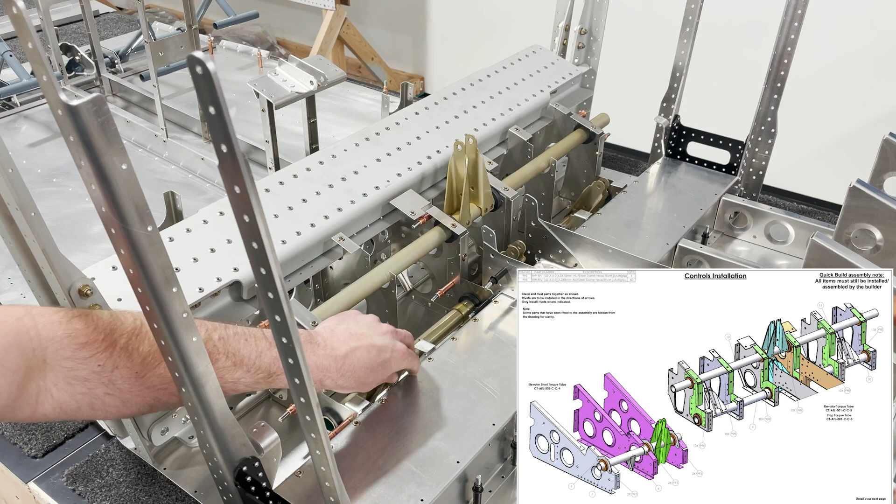So the next step is to fit our control torque tubes for the elevator and flaps. This process is fairly time consuming to get perfect, but it needs to be perfect for a smooth flying experience later on. So a couple things to make note of.

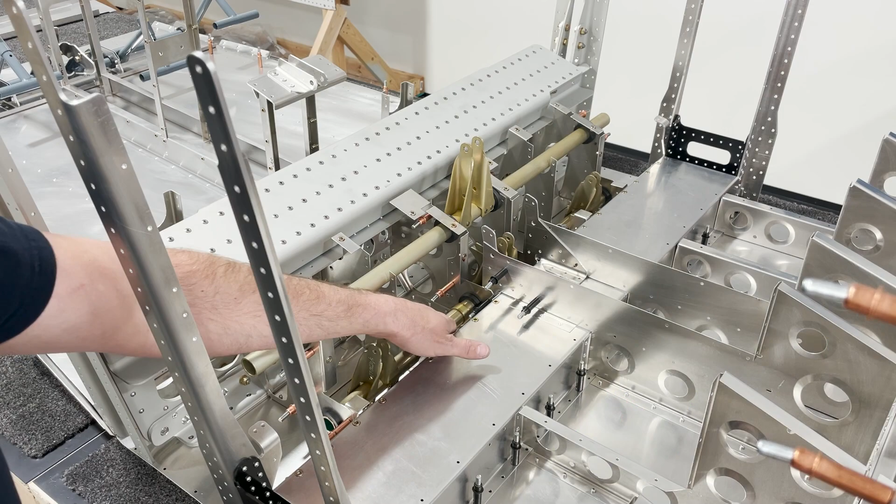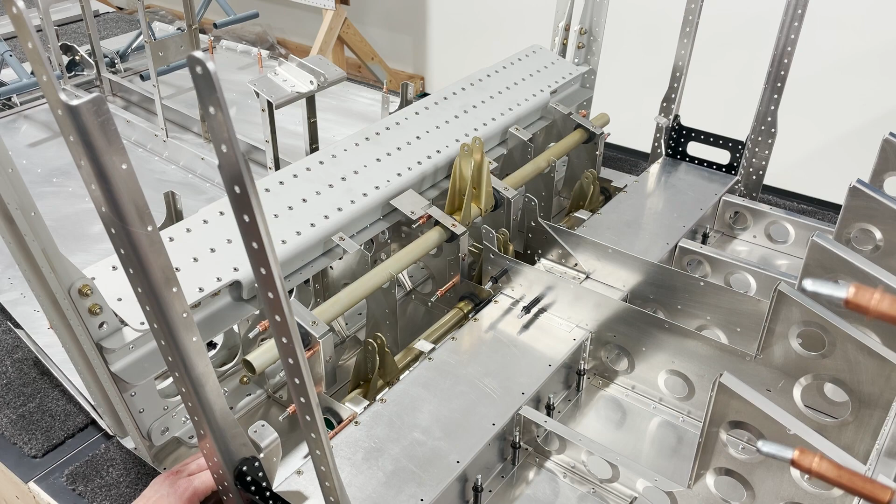First, start with your elevator torque tube and make sure that all of the channels at the bottom of the U are aligned perfectly. If that means removing very small amounts of material from the center, as was the case with this assembly, with the center two channels, do so, so that all four bushings contact the bottoms of their channels at the exact same time. That's the first step. Any slight amount of binding in these bushings will cause this to bind up really bad.

And of course you want this to be perfectly smooth, and you don't want to have to use any grease or lubricants on it, same as the rudder pedals. If you want to use dry lube, that's fine, but you really shouldn't have to once everything is dialed in perfectly.

So once you've got it resting down into the bottom of the U channels smoothly and evenly across the whole assembly, the next step is to cleco on these locking channels here to make sure that the assembly is still fitting perfectly. All these holes should line up on the channels. You can notice that I've left these two off.

That's just because they're not locking in any bushings, so of course they're going to fit without issue. So then once you start testing on these locking channels, you may need to remove very slight amounts of material from the top of these, just so that you get a firm fit. There should be no play in it whatsoever. But sometimes there's a little too much interference, and that causes the assembly to jam.

So once again, it's a very time-consuming process. It's 0.1 millimeters at the most at a time, very slowly removing material so that everything is dead straight and perfectly aligned. Then once you've done that with the elevator torque tube, you'll do the exact same process with the flap torque tube.

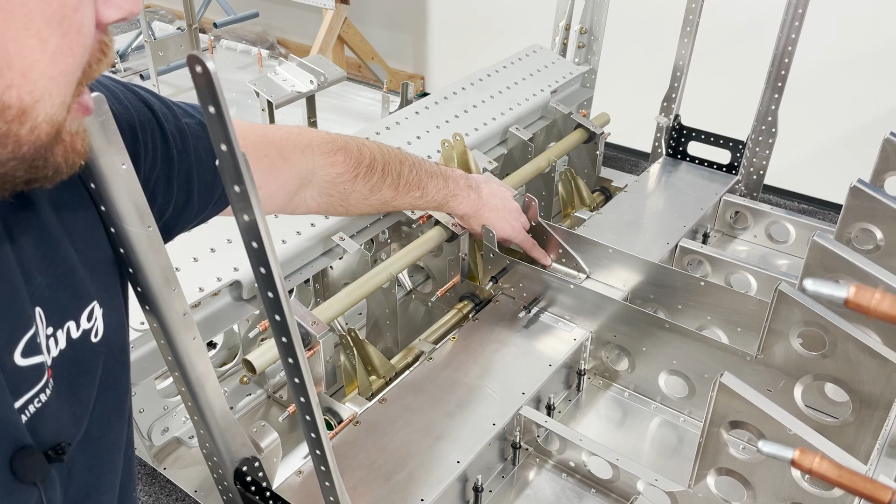Next step is to get your seat belt reinforcement brackets installed. There's a little bit of a trick to those as well. They're such thick material that when this bend is created, it'll flare out just slightly. You might be able to see it here. With this thicker material, when they bend it, just the far inside end will flare out slightly, and you want to very slowly file that material down so that it's a nice smooth fit across all of the faces.

And so now that we've done that, we can join the rear fuselage onto the center fuselage and keep working from there.

The next step is we're going to join the center and the rear fuselages together. So as you can see here, you'll need to place the rear fuselage up on blocks so it meets the proper angle to the center fuselage.

I like to use these foam core insulation panels because they cut and stack easily. You can make a wood jig or whatever is easiest for you. And then we're going to start by clecoing the center to the rear fuselage, and I'll show a better angle of that.

As you can see here, the rear fuselage joined to the center fuselage. You'll start by clecoing and then riveting the three rivets from your longerons to the ribs here, and then you'll rivet the three rivets from the rib to the rear fuselage.

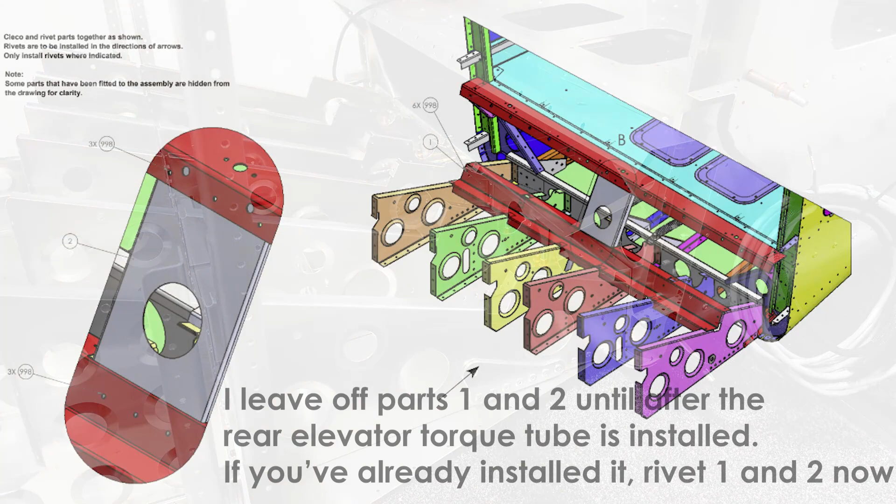This is where it's kind of a personal decision, whatever is going to be easiest for you. If you don't have this rear floor skin in place yet, it is easier to access all of those rivets, but having that rear floor skin also gives you a little bit of added support for the location of the ribs. So there's no better way to do it, it's just whatever works better for you.

Once we've got all of those rivets in place, you can also see that I've got a line of clecos holding the floor skins between the two pieces together. We will have to rotate everything onto its side at a later step in order to get those rivets in.

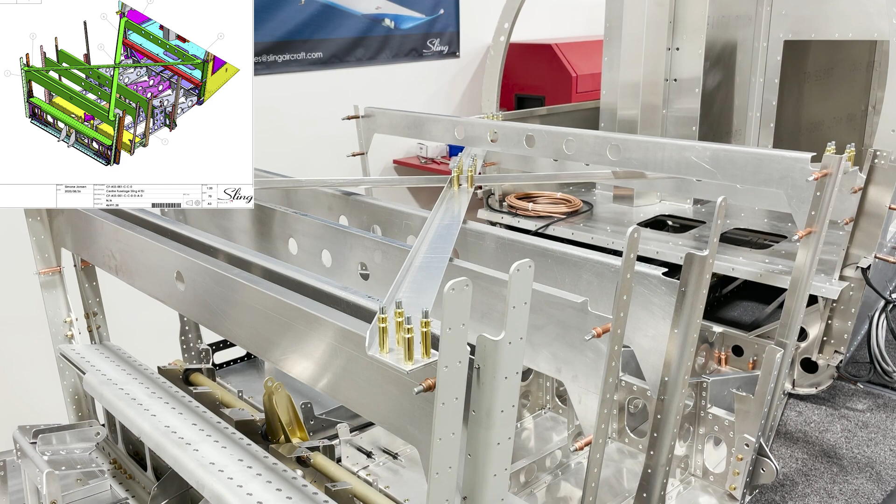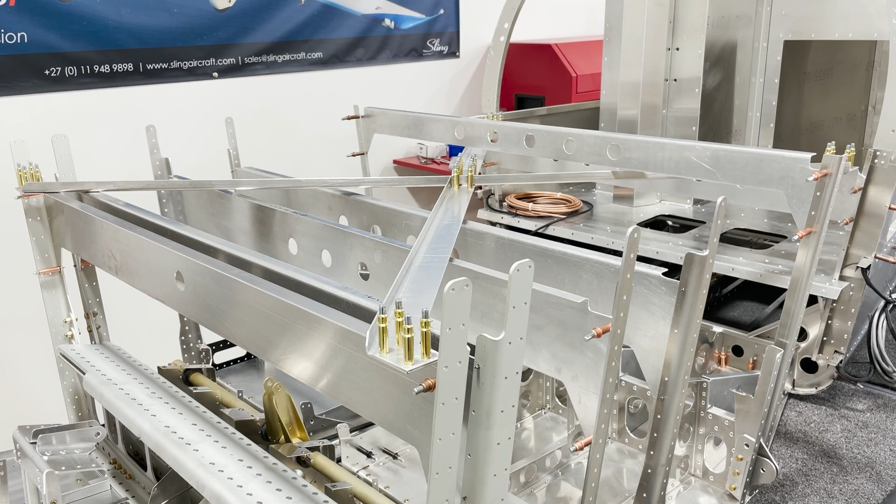The next step is fairly straightforward. We've got to assemble the cross bracing onto your jigs, and that holds the top as well as the rivets from below holding the bottom. So everything should be aligned well and there's no twist in the assembly or weird torquing on any of the parts. So rather than installing the control tubes, the control sticks in place right now, we're going to move ahead and do the side skins.

Sometimes there can be some strange positioning issues that can cause those control sticks to bind if you leave everything sitting as it is right now. So we'll go ahead and get those side skins installed, and then we'll install the control sticks.

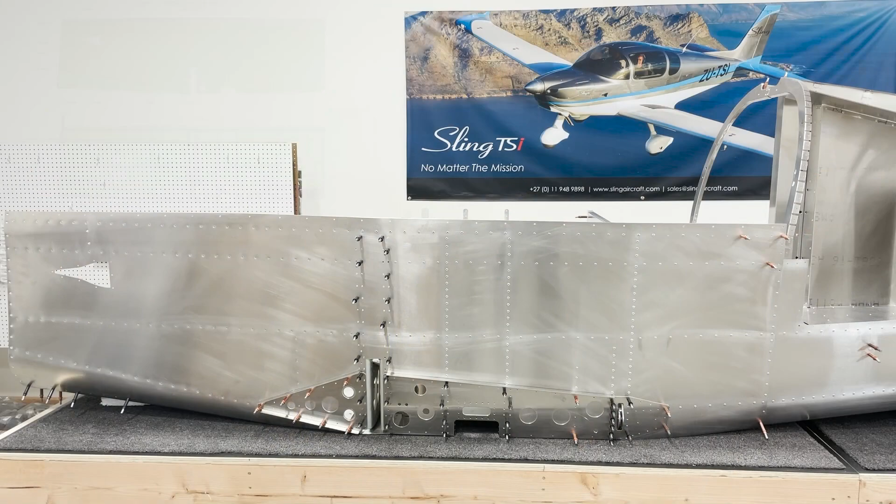The center fuselage side skins installation is fairly straightforward with the exception of a couple things to look out for. When you install all the rivets onto your center fuselage side skins here, make sure to, if you don't cleco these support channels on, at least line them up and mark out where they're going to lie. You don't want to rivet any of the rivets down here where they're going to go. And you don't want to install these before you've riveted these, because there's a couple rivets, mostly just this one here and this one here, that are a little bit difficult to access with this plate here. So keep that in mind.

I always just basically cleco them on how you see here, and then rivet here, remove them to put this rivet, and then move forward. Also, in this top corner here, I leave off some of these rivets down here because I put on the rear top skins in a little bit later step, so that just makes sure that when I pull these clecos out, I'll have enough space to kind of peel this back and let that top skin get underneath here.

In addition to that, as you can see, I don't have my main spar channel riveted yet, or the carry-through channel riveted yet. And that's because there's one extra step here that I like to do before riveting this down nice and solid, and that's just measure the main spar thickness on your wing and make sure that's exactly the same dimension as here. If you rivet this down and this is for some reason too tight, you're going to run into problems for final installation of your wings later on.

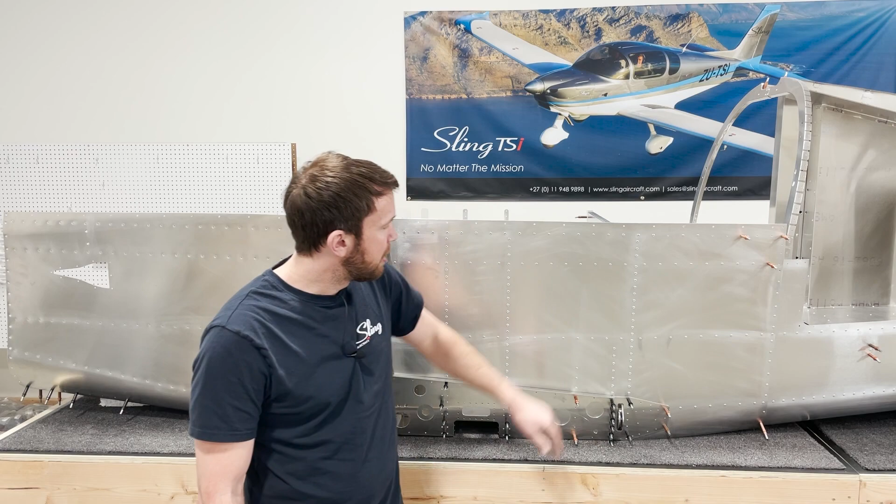Lastly, the top couple rivets here may have not been punched in your side skin. So this is your rear spar support channel that comes up right here. You'll want to, after you've got everything else installed, match drill those from the other side to put the hole on the side skin here, so that channel can be riveted all the way up and down. Other than that, this process is fairly straightforward and everything should line up nicely.

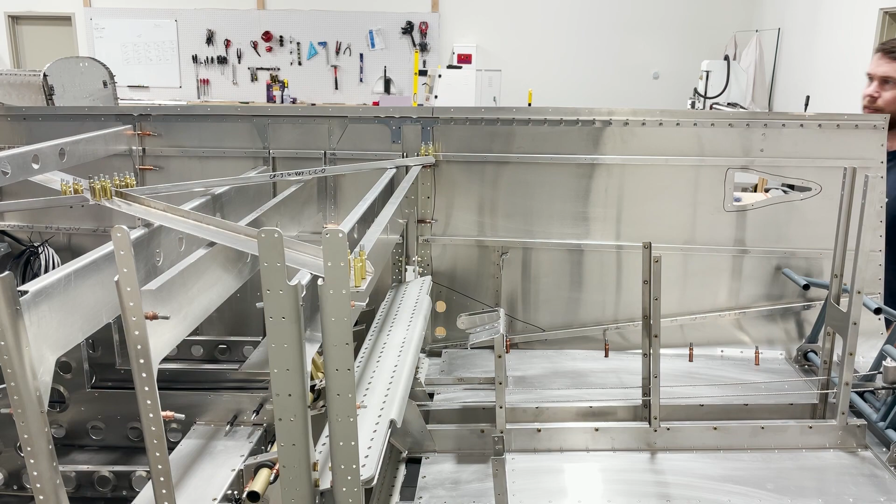Here's a look at the same side skin from the other side. A couple things to make note of here are these support channels here, here, and here. There's a spacer that goes between this support plate that you see here and this rib. And that's just to compensate for the thicker material of the spar carry through here and the channel and the rib, so that it's a nice clean fit along here.

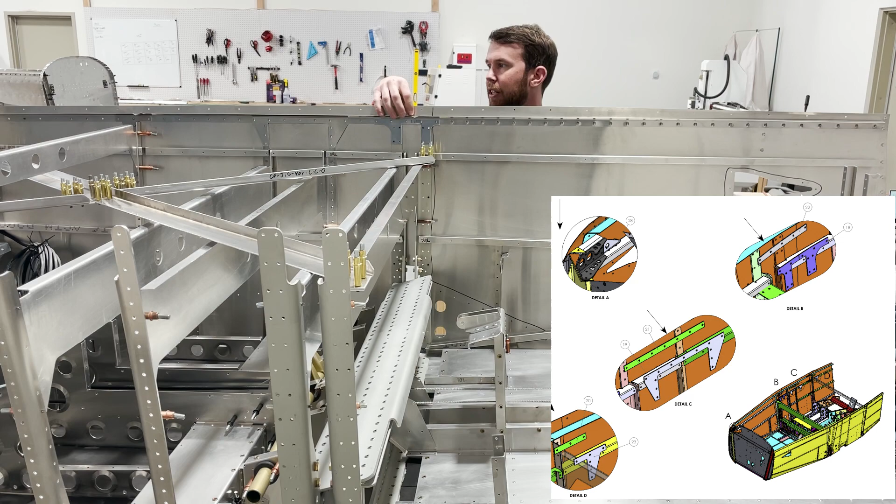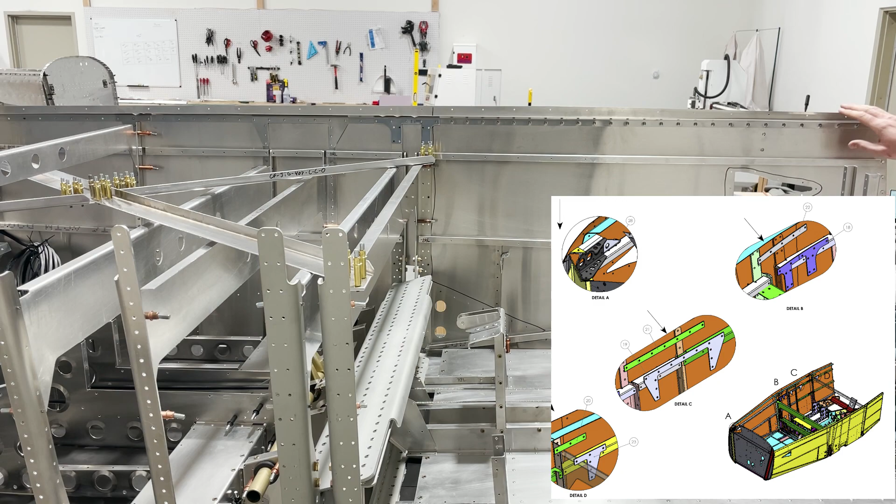Same thing with this one and this one here. So just keep note that the spacer goes between that support plate and the rib here, and everything should go smoothly.

So the next step is to install the firewall. The easiest way to do that is before you actually put the firewall onto the plane, make sure to attach your rudder cables up here and torque the AN3 bolts properly.

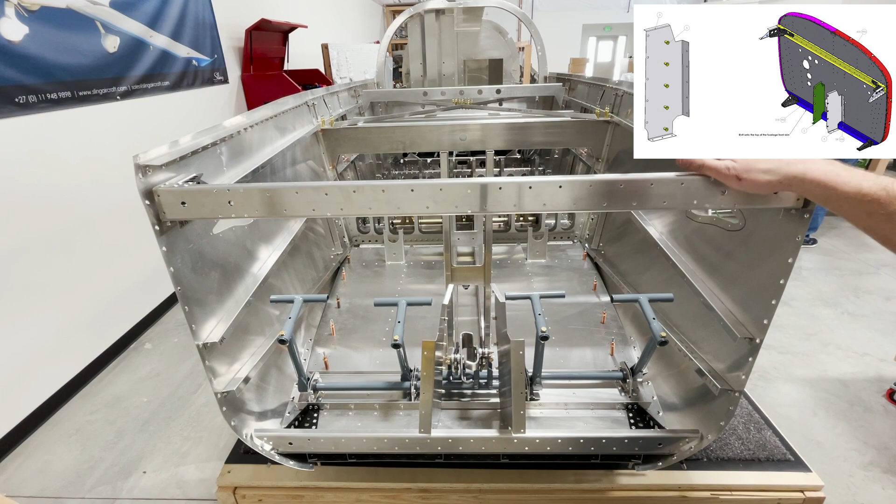Rather than installing these channels to the firewall and then the whole assembly onto the airplane, I install the channels onto the fuselage first. It's a lot easier to get these rivets in - you can rivet all of these up top here and all of the rivets going in here and on that side of the plane, and then the only rivets remaining are underneath here on both sides. That's by far the easiest way to access all of that without the firewall in the way.

Similarly with these channels down here and these reinforcement braces, and lastly these side plates for your center console. It's easiest to rivet them down now - first install the riv nuts going along both sides from the outside in, as you see here, then rivet them down, then dimple the firewall and dimple the firewall retaining strips on your cowling fastening strip, and we'll install it all onto the plane and the process will be a little bit smoother and easier. No matter what, it's a bit of a struggle to get these side skins to come up and fit properly to the firewall, but with this brace already in place, it makes it a little bit easier.

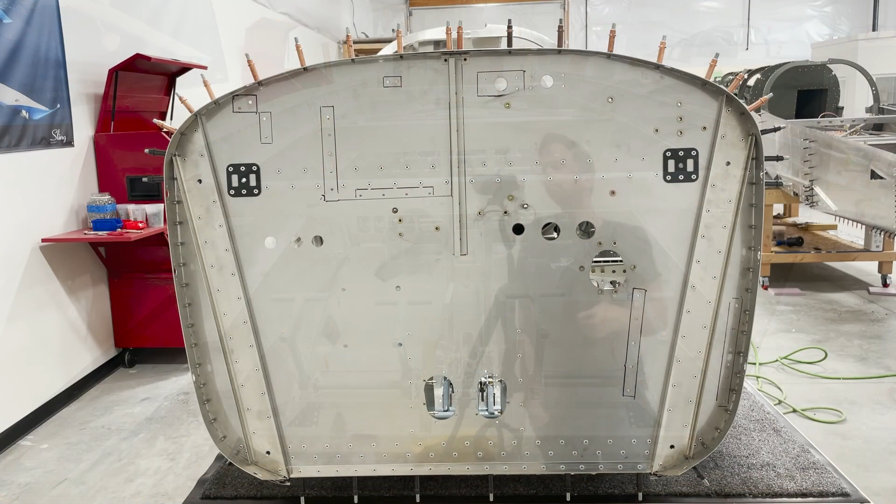All right, so now we've got the firewall all riveted up with its reinforcements. A couple things to note: first, rivet the firewall to the supports, and once all the rivets are installed there, then install these bracing channels. There's a couple rivets back in here and on the other side that you won't be able to access easily if you try to do it all at once with these bracing channels in place.

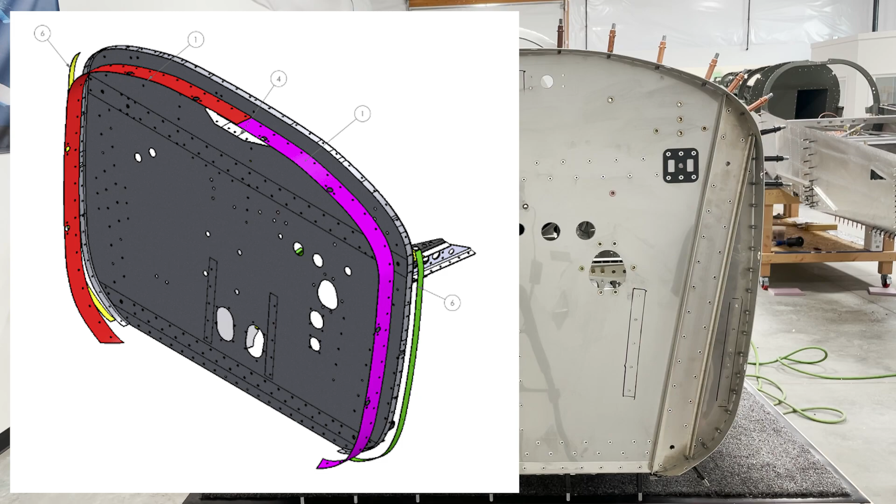The next step is to install your cowling mount strips. These go on the inside of the firewall flange, and the spacer strip goes on the outside of the firewall flange but inside of the side skins. Keep in mind that you dimple the firewall, the cowling mount strip, and the spacer strip up to this top row of dimpled rivets and down. Everything up here remains undimpled because the front top skin composite part is going to rest on these, and we'll just countersink that to bury the rivet with the countersunk.

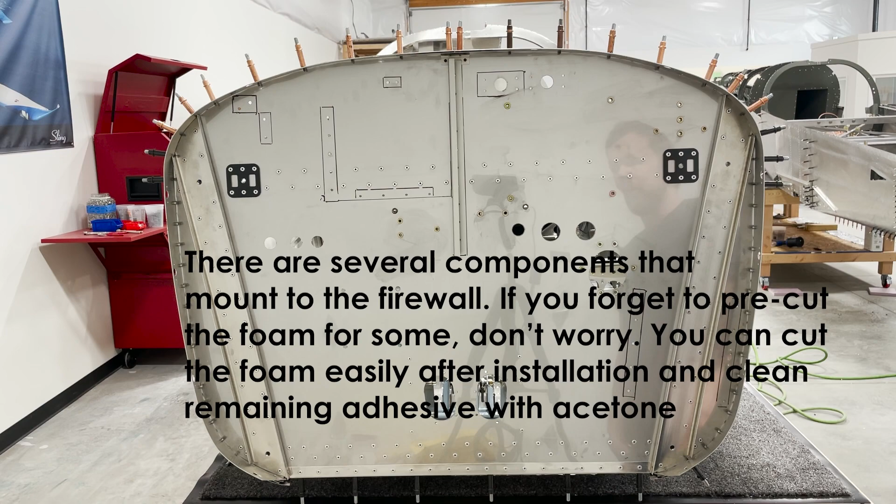The next step is you're going to mount up all your components to the firewall that are going to go onto it, and trace out where those components go to give yourself a template for cutting your firewall soundproofing sheet. In the firewall manual, you'll see the riv nut detail for what size and which direction. Keep in mind there are 2 riv nuts that go from the inside to mount your heater. Now that we've got all of our riv nuts installed and our template drawn out, this particular assembly only uses one of the GPS antenna mount brackets, so we're just going to put a plate over the top of it and then cover it with the foam. Here we see the template - I've got it cut out and we'll install that next.

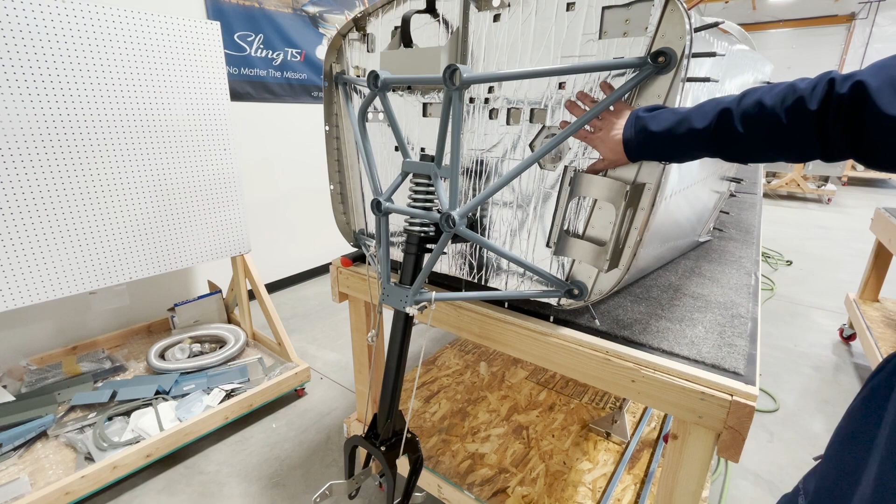Once we've cut and installed our firewall heat protection, we can install all of the components we've got. If you don't yet have your firewall forward kit, that's okay - we can still move to this next step. All of this stuff is still accessible. Just make sure to rivet on everything that you can, since it's a lot easier to do before our engine mount's on. So as you can see here, we've moved on to the next step and put the engine mount on.

If you haven't yet installed your canopy, like with this particular build, you can leave off the parachute tangs if you are doing the parachute option. We'll have to remove these bolts to put the parachute tangs on once the canopy is installed, or the parachute cable through the tang there. So that part's okay too, no problems.